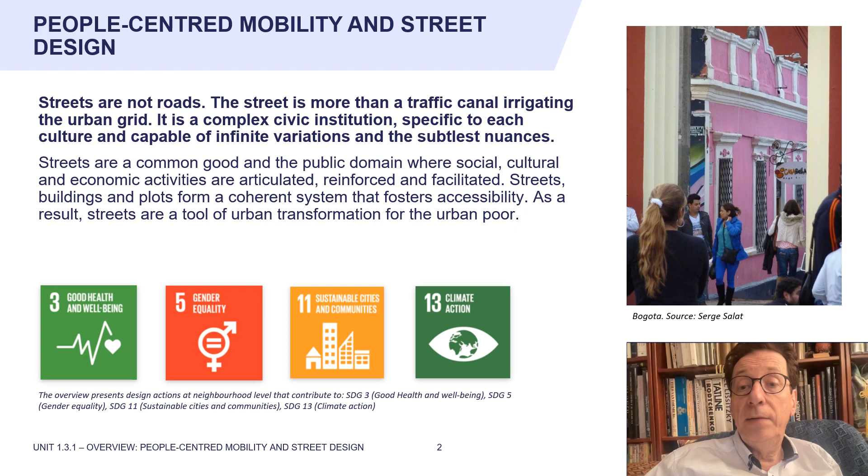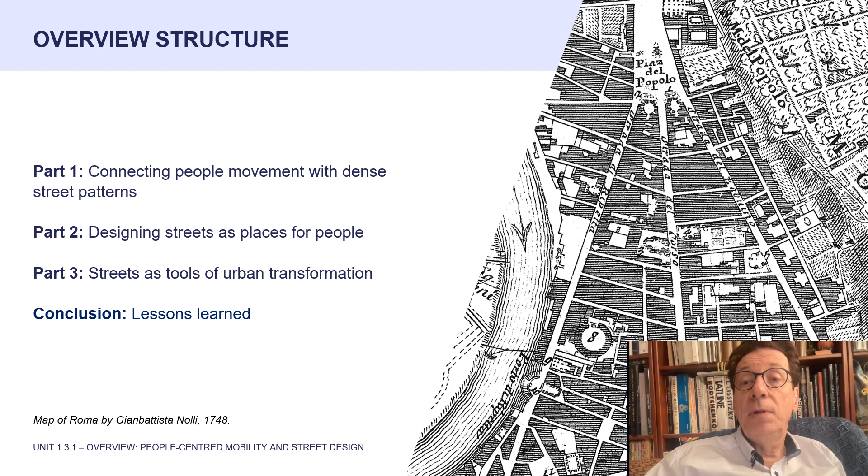This overview presents design actions at neighborhood level that contribute to SDG 3, 5, 11, and 13. It presents tools to connect people movement with dense street patterns, to design streets as places for people, and to leverage streets to foster urban transformation.

Part 1. Connecting people movement with dense street patterns. Streets have multiple functions as links or places with commercial, economic, civic, ceremonial, political, cultural, and social values.

Thus, sustainable design begins with understanding people's patterns of motion, as they access their daily needs, including recreation and enjoying green space. Sustainable urban form has more to do with movement through space than with a static vision of the city shape.

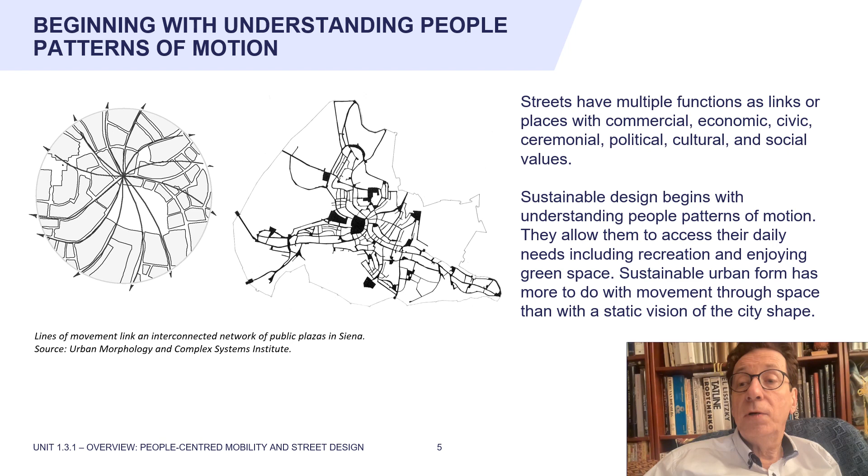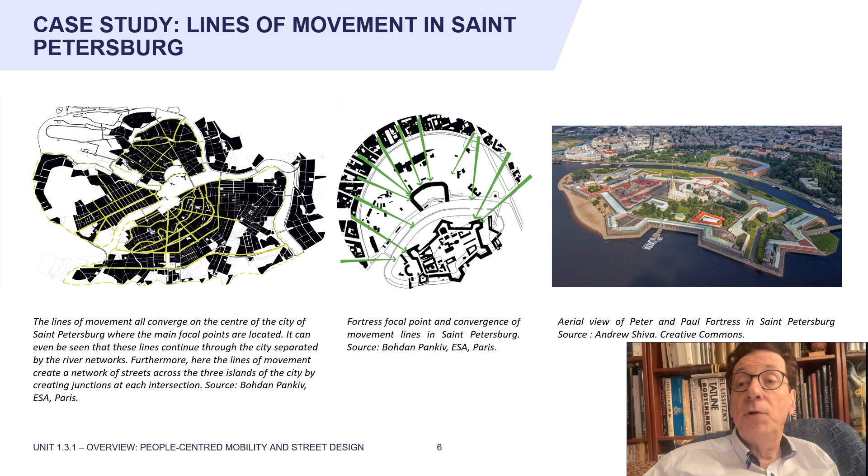In Siena, for example, lines of movement converge and link an interconnected network of public plazas. In St. Petersburg, the lines of movement converge on the center of the city, where the main focal points are. These lines continue through the city across the river separations.

Enhancing linkages provides access to neighborhood amenities at walking distances. It provides convenient and continuous passage between and within neighborhoods, prioritizing pedestrians and cyclists. It improves connections with transit systems, expanding the capacity and viability of these systems as a whole.

When needed, additional streets should be added to connect internally and externally the neighborhood, as shown in the drawing.

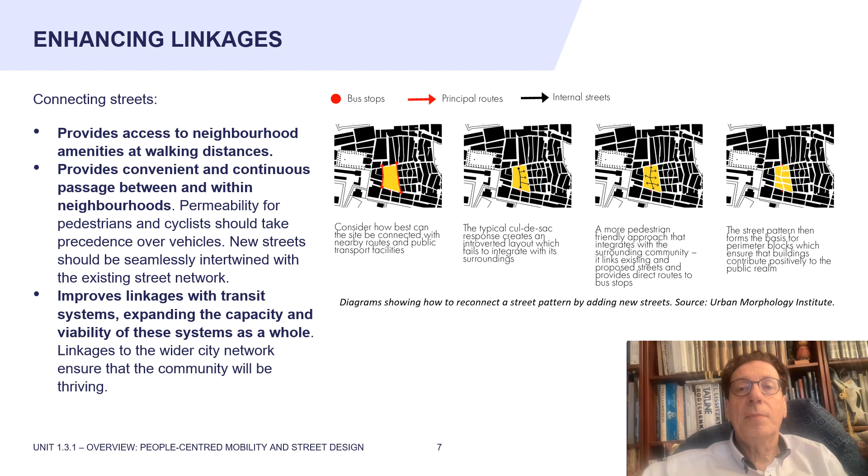In King's Cross, London, the historic grid was revived as a new primary urban framework, with a central spine running north to south and the canal flowing east to west. 20 new streets lead through 10 new parks, leafy squares, and other open environments. All this is at a human scale, so visitors, residents, tenants, commuters, everyone can benefit and enjoy.

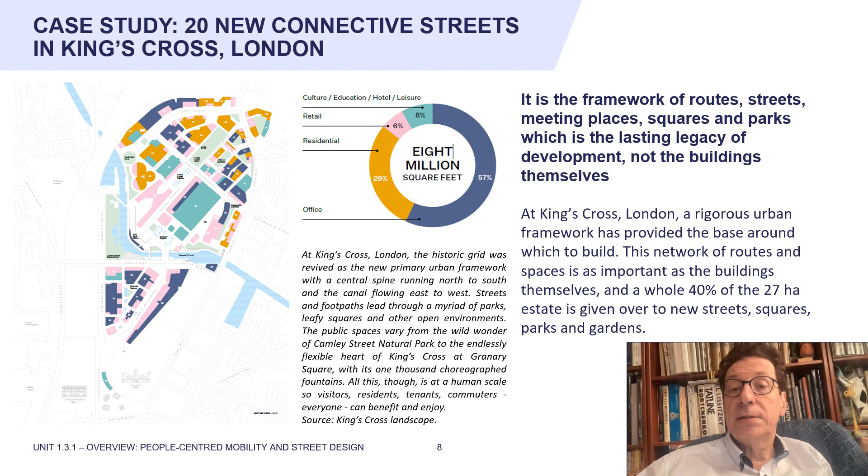This network of routes and spaces is as important as the buildings themselves, and the whole 40% of the 27 hectares is given over to new streets, squares, parks, and gardens.

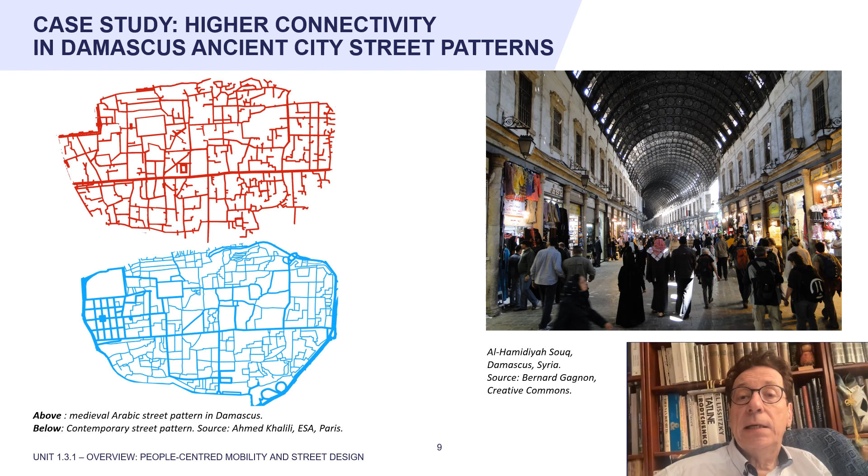A further example of street pattern evolution is Damascus, where the ancient city streets have evolved over time from typical Islamic tree patterns ending in cul-de-sac into reconnected patterns. High density of street intersections and a fine-grained urban texture composed with small blocks divided into multiple plots promote greater fluidity and ease of access.

To design dense and connected street patterns, international benchmarks and UN Habitat suggest that an 80 to 100 meter grid spacing, corresponding to a density of intersections of 100 per square kilometer, represents an optimal network for pedestrians and vehicles. At least 18 kilometers of street length per square kilometer provides good connectivity.

In very connected and livable cities, the length is usually higher, around 30 kilometers of street length or more per square kilometer in Hong Kong, Tokyo, Amsterdam, Paris, while it is 23 in Manhattan and 17 in Singapore.

Variety and flexibility in the dimensions and shapes of grids, with irregular patterns, create better movement lines when focal points are community amenities. A variety of length and width, with a high proportion of 12-meter wide short streets completed by a few larger, more connective streets, enhances both connectivity and walkability.

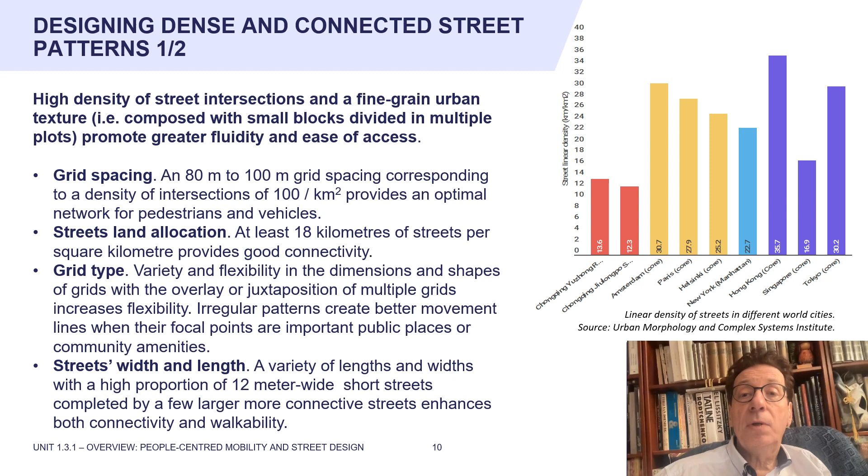Density of intersections is a good measure of connectivity. In many livable cities, it is much higher than 100 intersections per square kilometer. It varies from around 460 in Hong Kong Central, 390 in Tokyo Nihonbashi, 330 in Seoul, 320 in Amsterdam, 240 in Paris, to around 110 in Singapore, New York Midtown, and San Francisco.

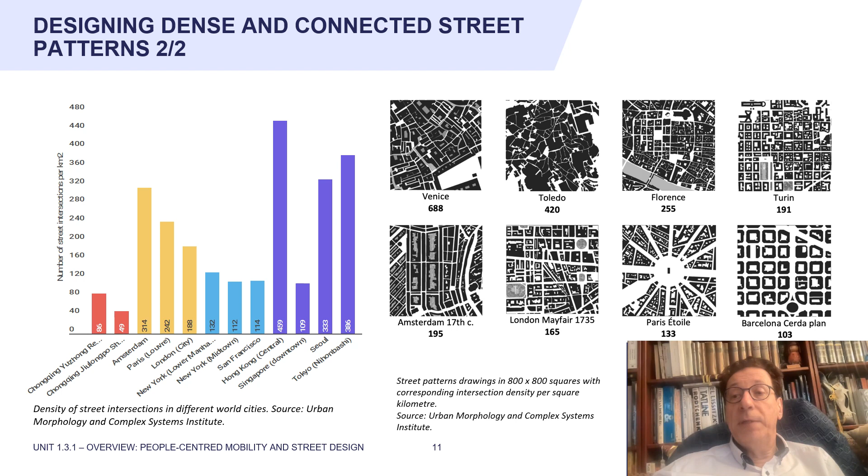Beyond numbers, street patterns should be design-driven and context-sensitive. They should not be the product of standard approaches and rigid models. Rather, continuing a grid structure may maintain connectivity, or eventually it may be more appropriate to adapt the present network to respond to important external factors such as views, topography, or building lines.

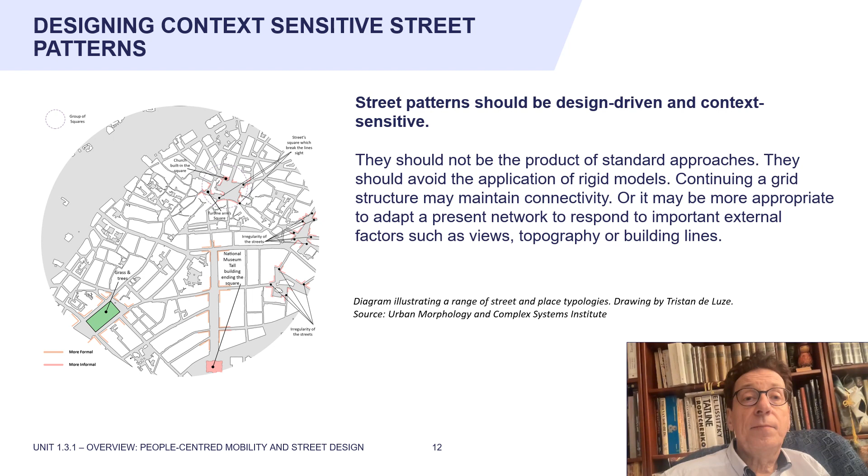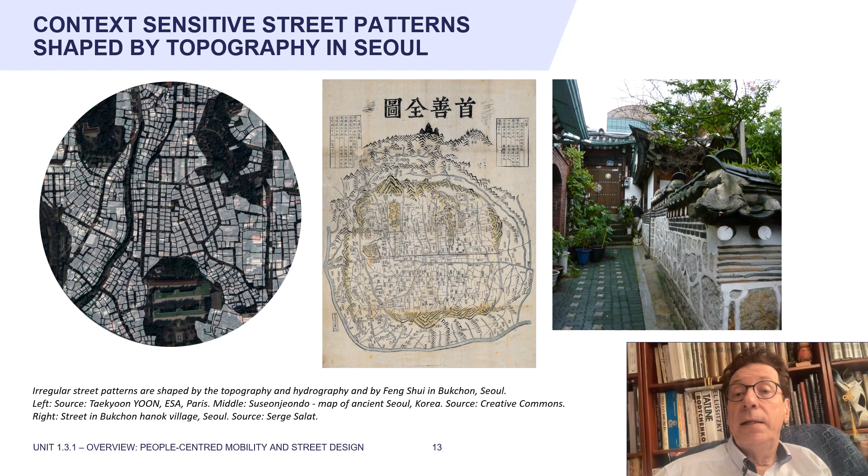For instance, in Seoul, irregular street patterns are shaped by mountains based on Feng Shui. Feng Shui is an East Asian system of thought originated from China. It stresses harmony with nature and has been interpreted as to prevent wind and to get water. An urban space enclosed by mountains and rivers is considered ideal.

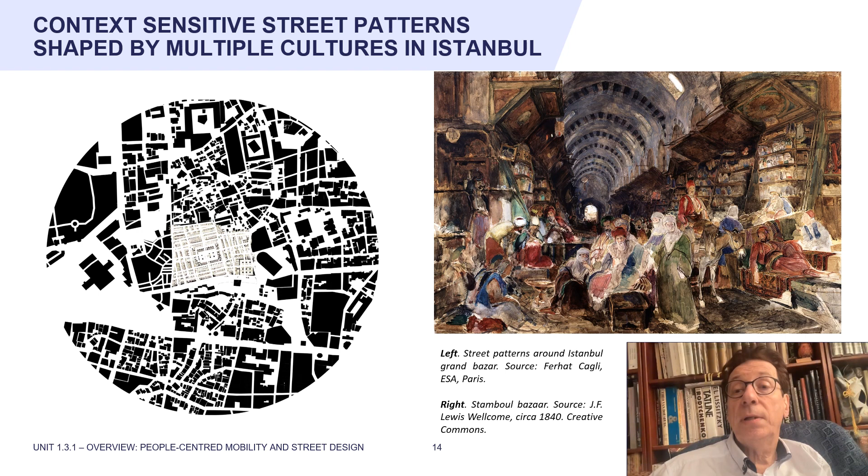Another example of context-sensitive street pattern is Istanbul, where the multiple irregular street patterns are context-sensitive responses to various cultures and traditions, as shown by the impact of the Grand Bazaar on the street layouts.

Street patterns can come in diverse forms, from grids to concentric to irregular. They define diverse block shapes. Fine-grained street networks and small blocks offer multiple direct and convenient routes between destinations. They make efficient use of land. They provide generous and connected public space and create quality places across many cultures.

Within this street perimeter block structure, planners can divide the land in small plots flexibly, and urban designers can have freedom to create innovative layouts.

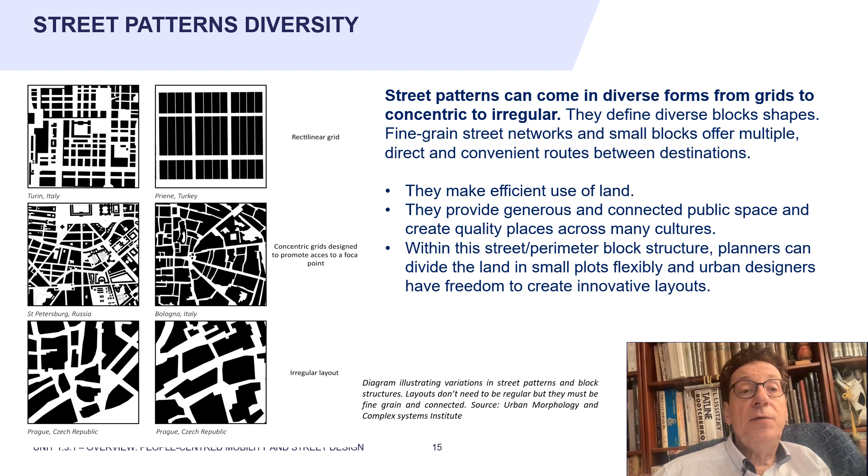Sustainable street patterns present diverse length and width in many livable cities. 70% of streets are less than 12 meters wide, and 50% of street space is allocated for pedestrians. Interior neighborhood streets are narrow. Wide streets planted with trees are allocated to the outer boulevard, where they serve as promenades, ensure traffic between districts, and delimit the neighborhood.

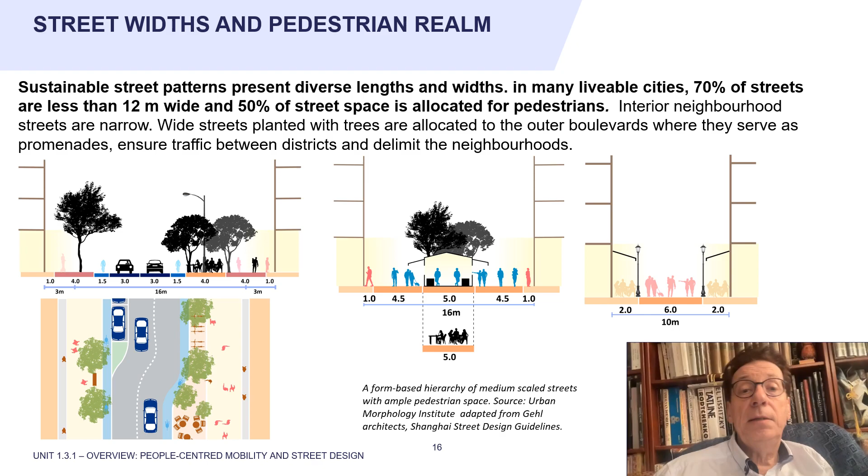Part 2. Designing streets as places for people.

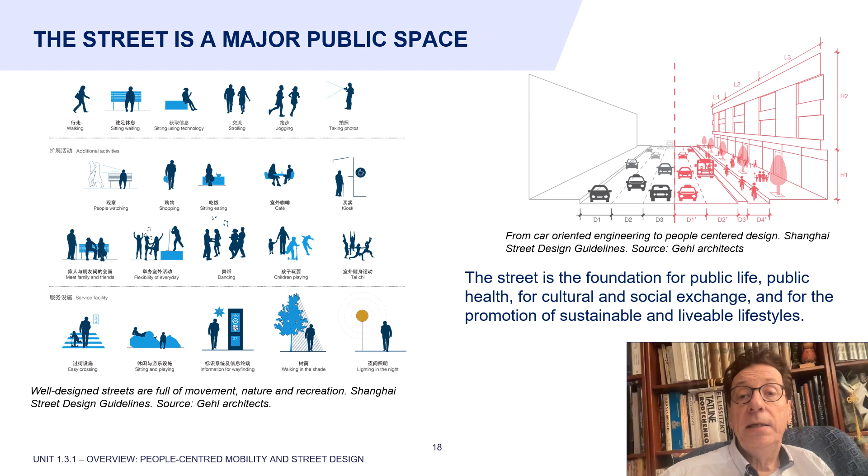The street is the foundation for public life, public health, for cultural and social exchange, and for the promotion of sustainable and livable lifestyles. Well-designed streets are full of movement, nature, and recreation. This requires a fundamental change from car-oriented engineering to people-centered design.

Streets represent more than a quarter of urban land area and define the identity of a neighborhood. Well-designed streets trigger economic activity. They attract shops and services. They create a sense of place. They bring an enhanced sense of security and orderly development.

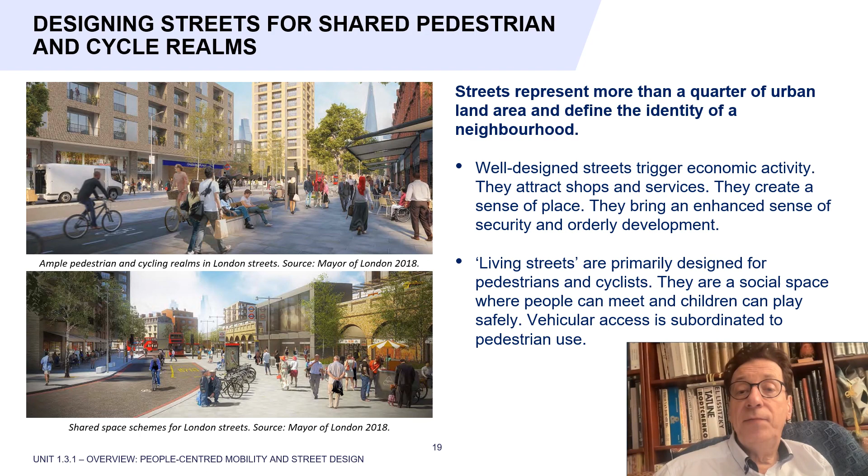Living streets are primarily designed for pedestrians and cyclists, as shown here in London. They are a social space where people can meet and children can play safely. Vehicular access is subordinated to pedestrian use.

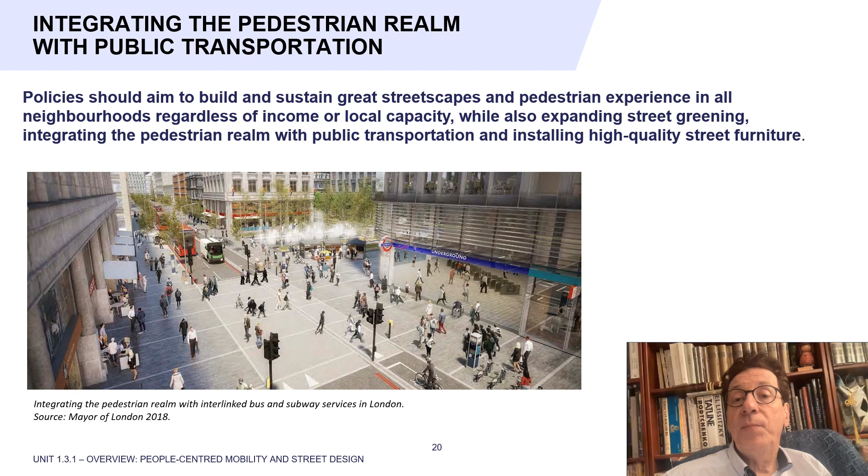Policies should aim to build and sustain great streetscapes and pedestrian experience in all neighborhoods, regardless of income or local capacity, while also expanding street greening, integrating the pedestrian realm with public transportation, and installing high-quality street furniture.

Reinforcing the intelligibility and visual coherence of streets increases the harmony between people and fosters a sense of community. Enclosure, or the outdoor room, instills a sense of position, of identity. Enclosure refers to how buildings, walls, trees, and other vertical elements define streets and public spaces.

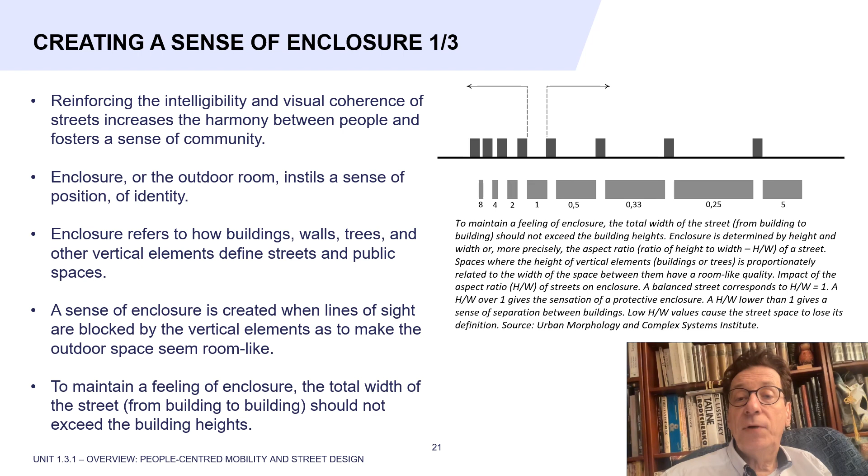A sense of enclosure is created when lines of sight are blocked by the vertical elements, making the outdoor space seem room-like. To maintain a feeling of enclosure, the total width of the street from building to building should not exceed the building height.

Islamic Medina streets present a high aspect ratio, height divided by width, which reduces the sky view factor, that is, the proportion of visible sky, and as a result prevents solar radiation and heat penetration. This creates a comfortable microclimate for pedestrians.

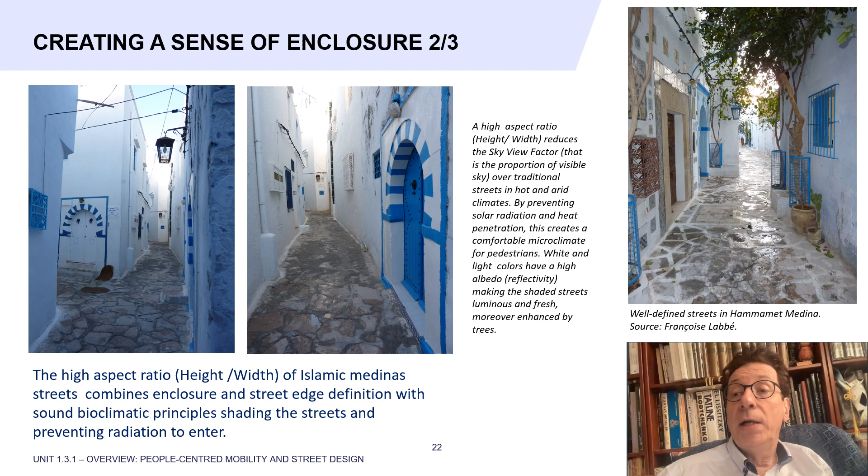White and light colors are used as they have a high albedo, or reflectivity, making the shaded streets luminous and fresh, while also enhanced by trees.

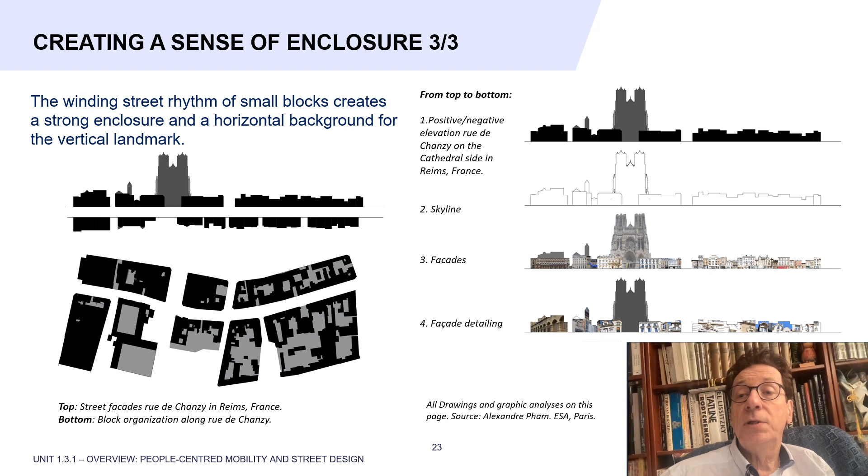A further example of enclosure can be observed in Reims, France, where the winding street rhythm of small blocks creates a strong enclosure and horizontal background for the cathedral vertical landmark.

Designing dynamic streetscapes creates sequences of discovery along people's progression. This can be achieved by designing a series of triangular funnel shapes. They close and open the streetscape and vistas dynamically, as in the historical center of Copenhagen and in Malmö Bo01.

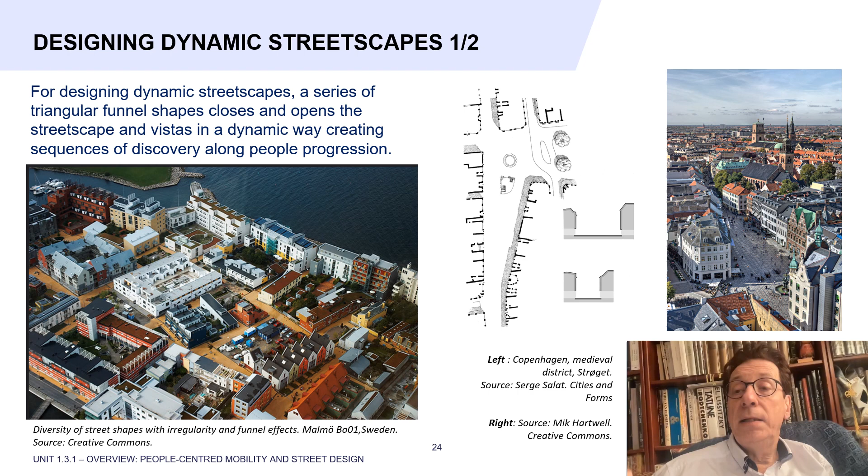In Malmö Bo01, human-scaled streetscapes are based on opening and closing spaces through funnel effects. Discovery experiences are created by the mix of formal and informal spaces, including a mix of streets, pedestrian walks, alleyways, squares, and water banks. As stated in the quality program, the plan provides many different opportunities for approaching and exploring the district.

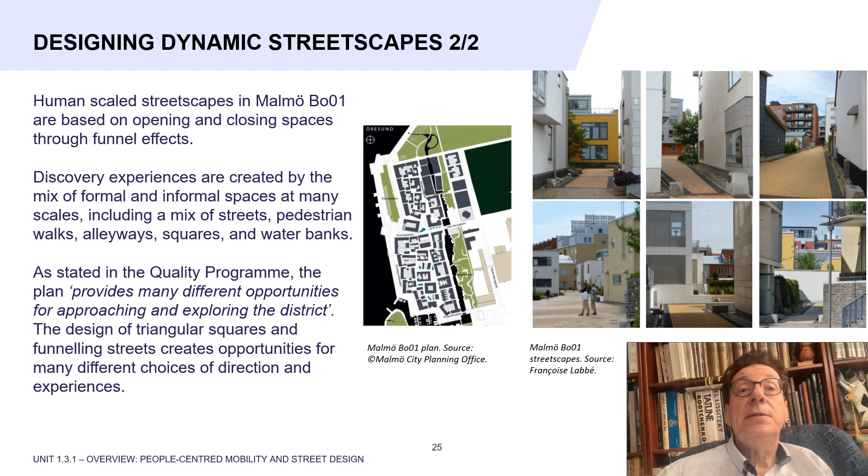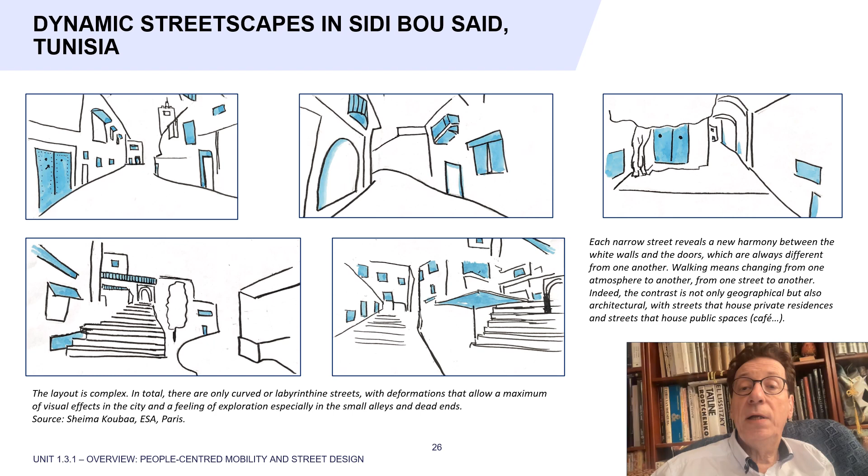In Sidi Bou Said, Tunisia, the curved or labyrinthine streets create visual effects and a feeling of exploration. Each narrow street reveals a new harmony between the white walls and the doors, always different from one another. Walking means changing from one atmosphere to another, from one street to another, with geographical and architectural changes.

Creating sequences in a design is a design tool for reframing the street from an infrastructure element to a livable, pedestrian and people-centered public space. Considering people's successive visual discoveries while they move through streets allows redesigning neighborhood streets as places for people and creating effective human scale and comprehension.

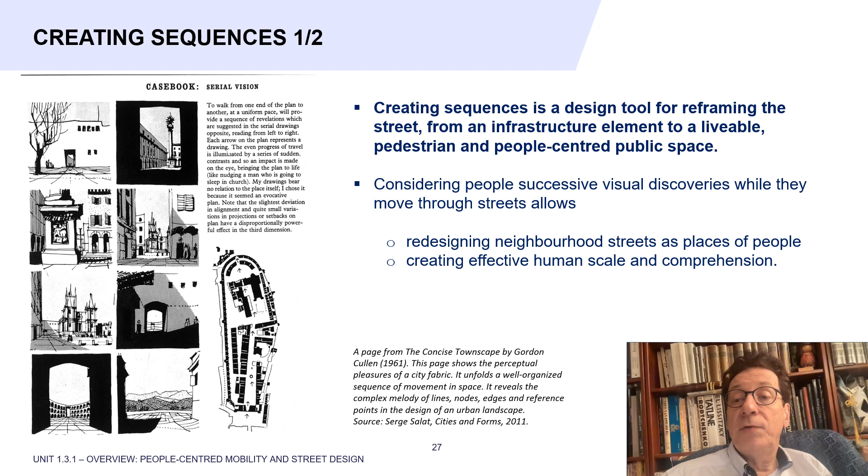This page shows the perceptual pleasures of a city fabric. It unfolds a well-organized sequence of movement in space. It reveals the complex melody of lines, nodes, edges, and reference points in the design of an urban landscape.

The most interesting streetscapes are formed with successive sequences. They frame the vision of people in movement. These sequences exist in many cities across diverse geographies and help people to orientate themselves along streets by forming memorable images.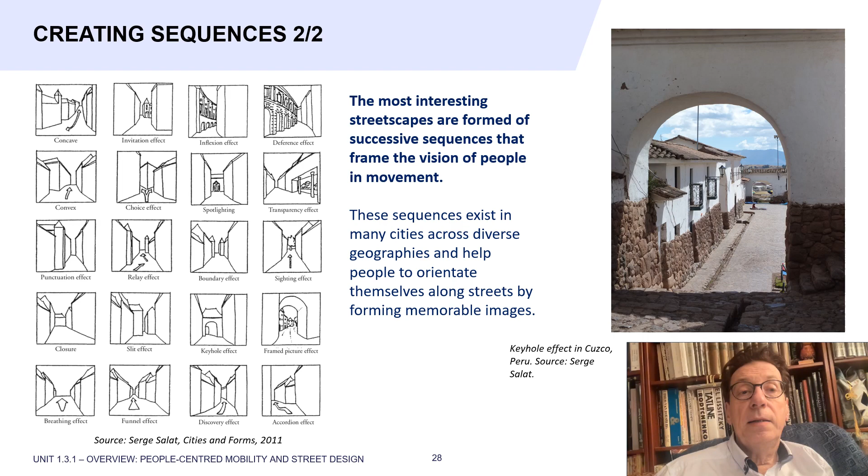The importance of sequencing is depicted by the case of Algiers Casbah. We can retrace the experience of motion through the city and capture the changes and contrasts in perceptions as we walk through the alleys, the frames, the keyholes.

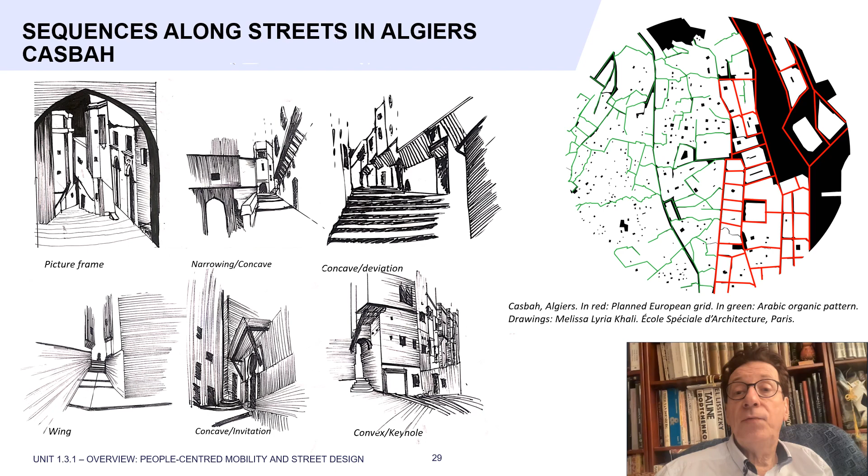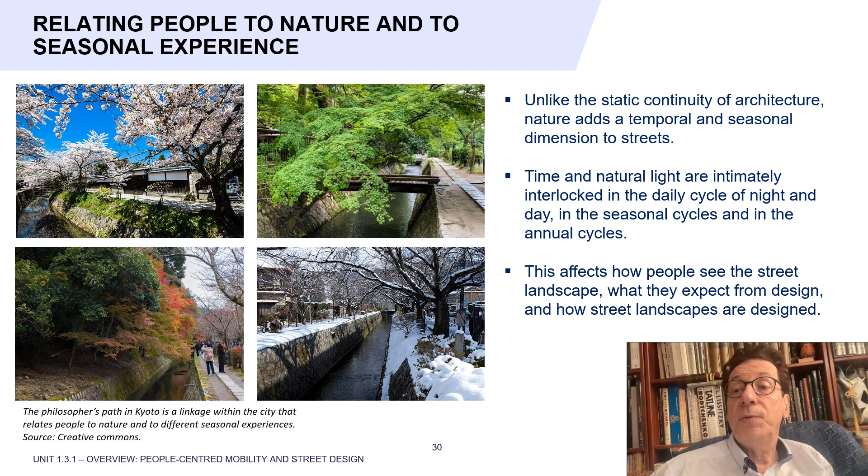Unlike the static continuity of architecture, nature adds a temporal and seasonal dimension to streets. Time and natural light are intimately interlocked in the daily cycle of night and day, in the seasonal cycles, and in the annual cycles. This affects how people see the street landscape, what they expect from design, and how street landscapes are designed. Detailed design is where the identity and quality of a place is finally won or lost.

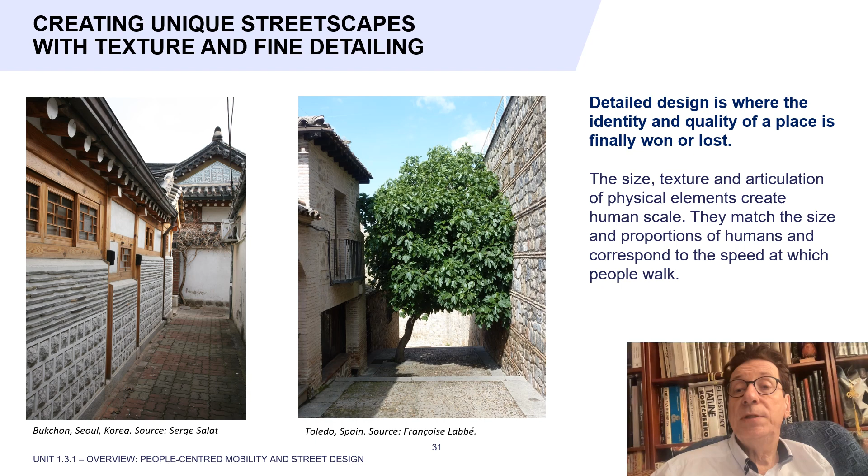The size, texture, and articulation of physical elements create human scale. These elements should match the size and proportions of humans and relate to the speed at which people walk.

Part 3. Streets as tools of urban transformation. Streets can lead to the urban transformation of deprived neighborhoods.

UN Habitat suggests that this can be achieved by focusing on streets and urban layout as the drivers of transformation, providing continued basic infrastructure provision, introducing public lighting and mixed use brings more usage and social interactions. It has positive impacts on public safety.

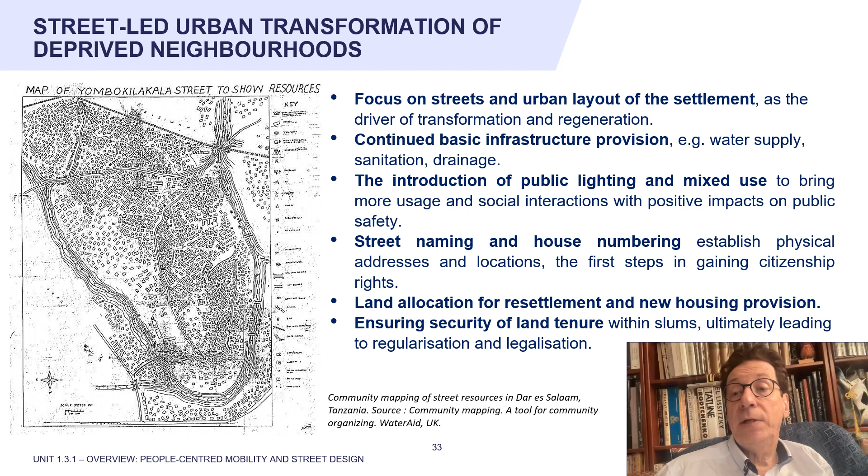Implementing street naming and house numbering fosters a sense of belonging. Allocating land for resettlement and new housing provision and ensuring security of land tenure leads to regularization and legalization.

A street-led city-wide slum upgrading, as promoted by UN Habitat, can be a practical and straightforward approach to integrate slums gradually within the urban fabric of cities. It rationalizes layouts and generates urban spatial patterns that transform slums into neighborhoods.

This approach builds on streets not only as natural conduits for retrofitting services and facilitating the movement of people, goods, and vehicles, but as the public domain where social and economic activities are articulated, reinforced, and facilitated. In this way, streets become tools for social, economic, juridical, and spatial integration of slums within the city.

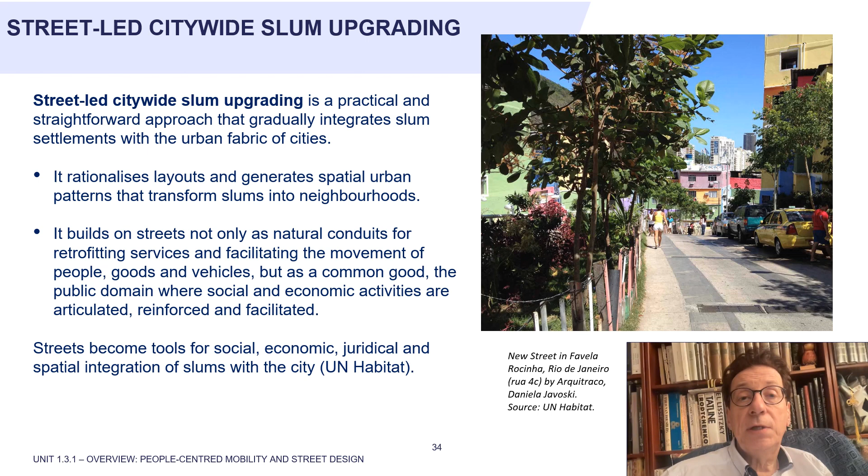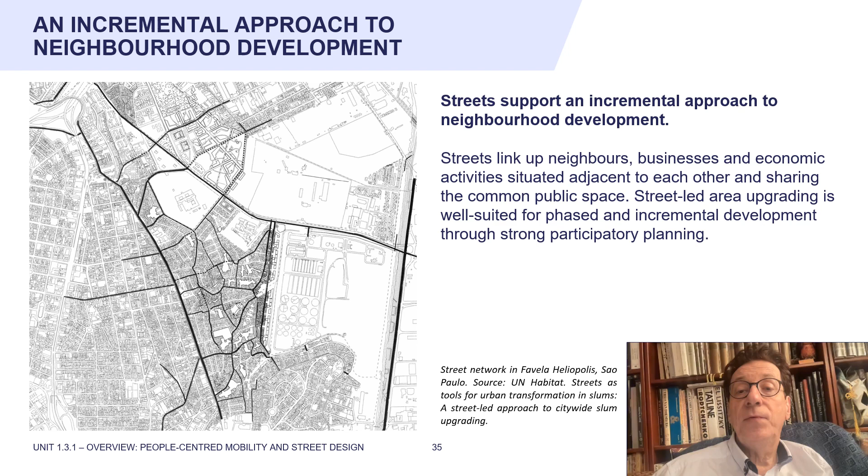Streets support an incremental approach to neighborhood development, linking up neighbors, businesses, and economic activities situated next to each other and sharing the common public space. Moreover, as demo projects of UN Habitat suggest, street-led area upgrading is well suited for phased and incremental development through strong participatory planning.

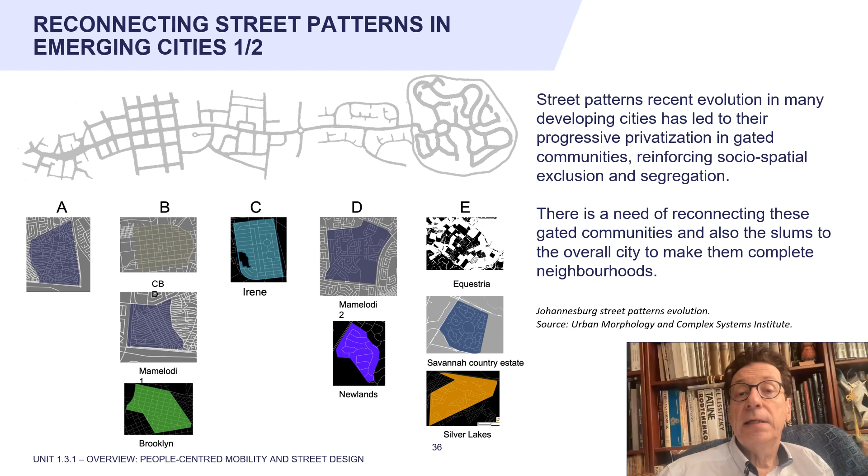In developing cities, streets can become means to reconnect the previously segregated urban texture. In Johannesburg, for instance, the evolution of street patterns and the progressive privatization of gated communities reinforce socio-spatial exclusion and segregation. It is therefore necessary to reconnect these communities and the slums to the city to make them complete neighborhoods.

Reconnecting street patterns in developing cities might involve providing quality public spaces, small and large, nodal and linear, and creating a permeable network of routes to extend the functionality of public open space.

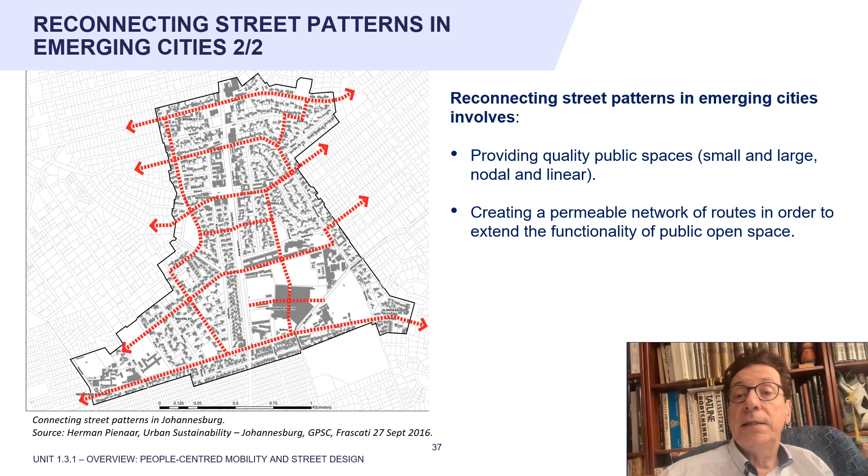Conclusion: lessons learned. Key takeaways are: streets are the major public spaces essential to urban vitality and healthy lifestyles.

Continuous and connected dense street networks can become again human-centered, providing for diverse movement patterns, uses, and activities. Policies aiming to build and sustain great streetscapes and pedestrian experience in all neighborhoods, regardless of income or local capacity, can foster green and thriving neighborhoods in many contexts.

Streets can become a powerful tool of urban transformation for the urban poor, for transforming informal settlements into neighborhoods and integrating them to the city.